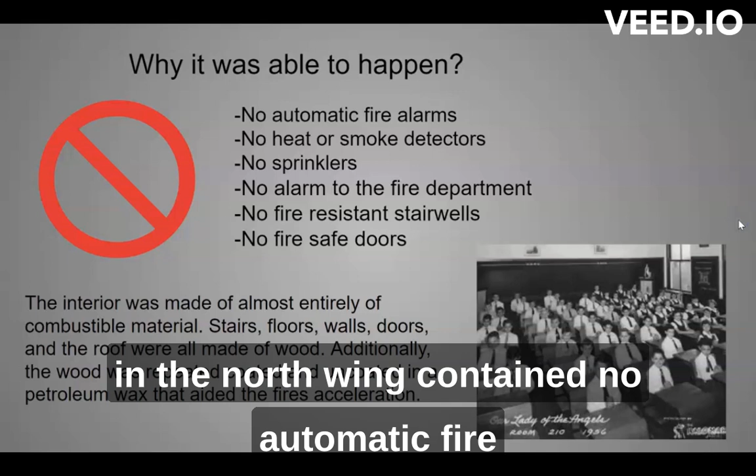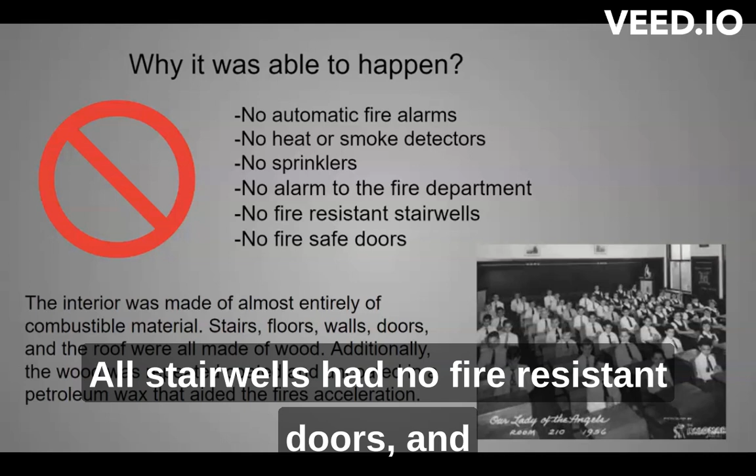Why it was able to happen. The building in the north wing contained no automatic fire alarms, no heat or smoke detectors, no fire sprinklers, no direct connection to the fire department. All stairwells had no fire-resistant doors, and the entire building was made of combustible material. Stairs, floors, walls, doors, and roof were all made of wood.

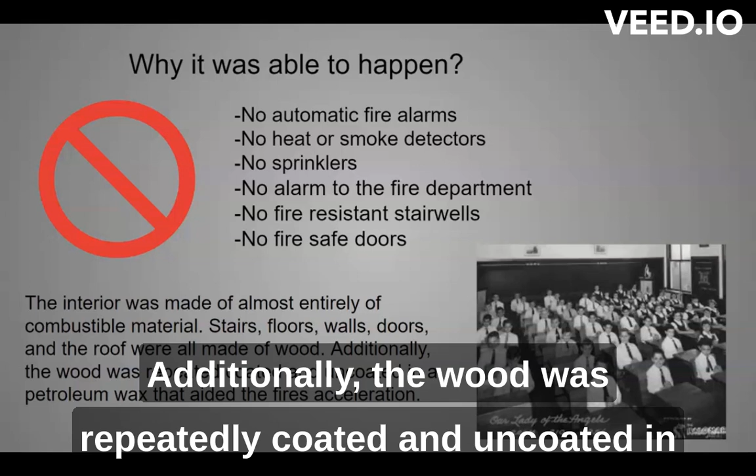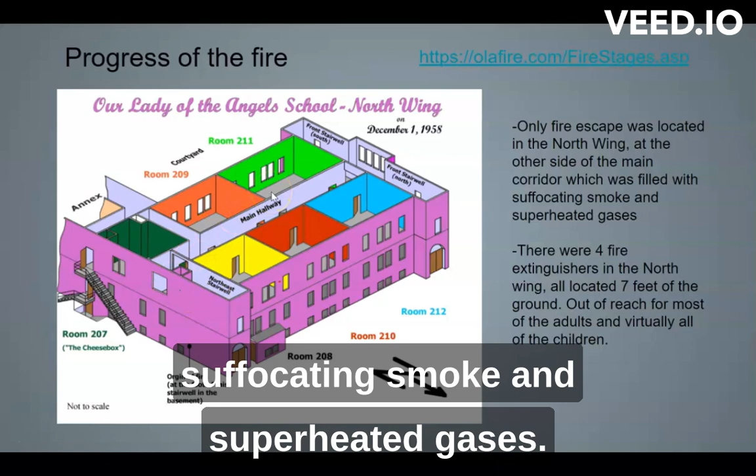Additionally, the wood was repeatedly coated and uncoated in a petroleum wax that aided the fire's acceleration. Only the fire escape located in the north wing was on the other side of a hallway filled with suffocating smoke and superheated gases. All 4 fire extinguishers were located 7 feet above the ground, out of reach of most adults and virtually all of the children.

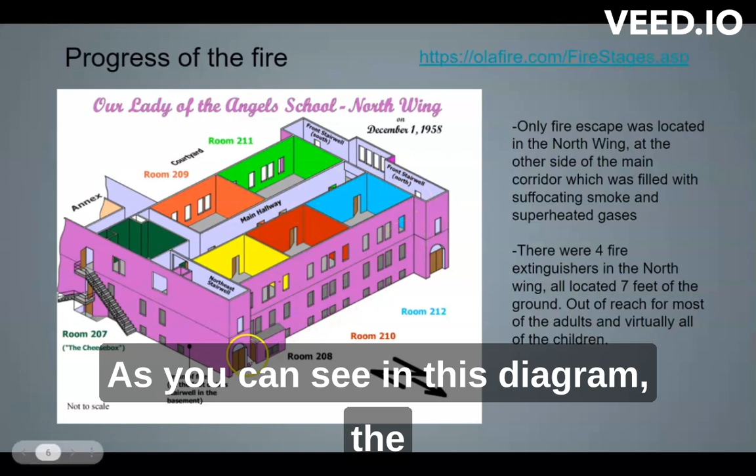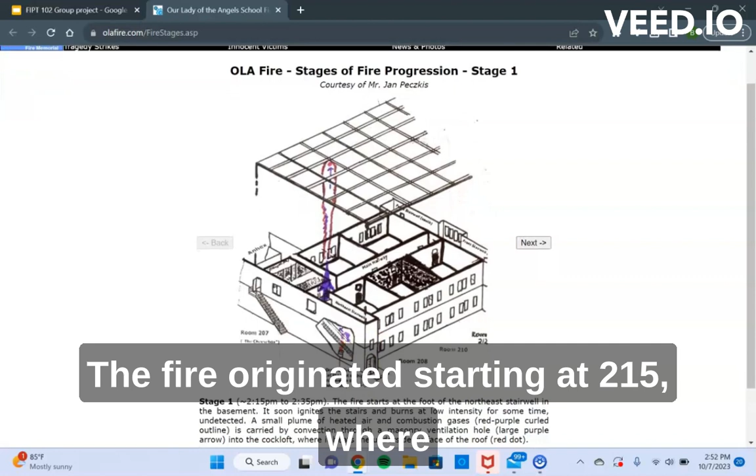As you can see in this diagram, the fire started here in the basement, where it quickly rose through the building. On olafire.com, we can see a good description of this. Right here, the fire originated starting at 2:15, where it would go unnoticed and burn the paper waste in the basement. As the heat accelerated, it cracked this window, adding oxygen to the fire, where it quickly grew.

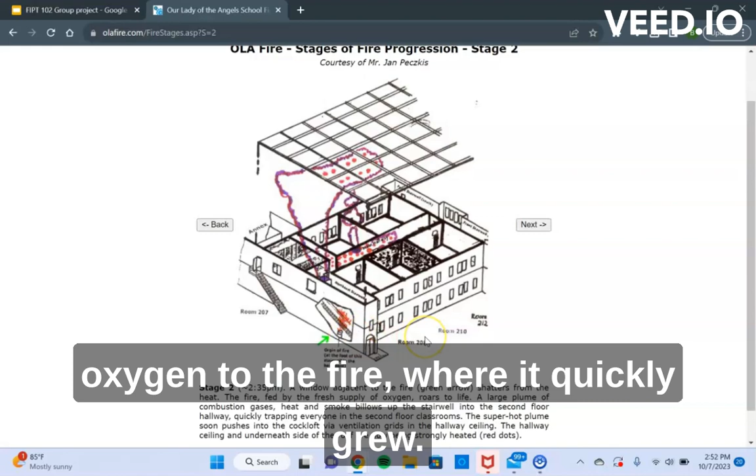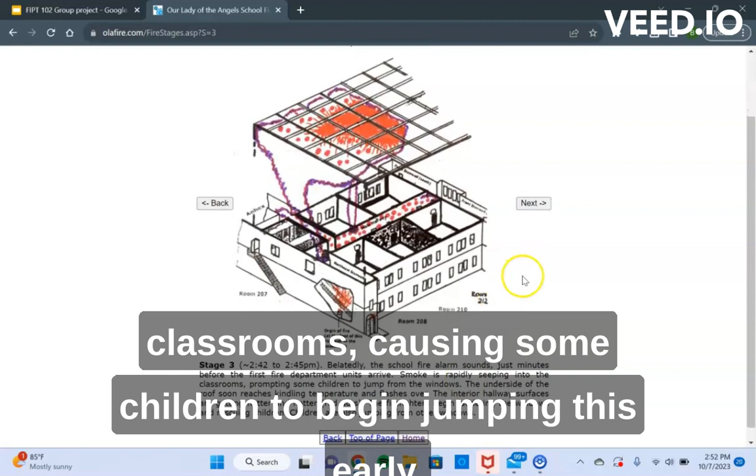Combustion gases, heat, and smoke all billowed up the staircases into the second floor hallway, quickly trapping everyone in the second floor classrooms. The superheated gases soon raised the alarms in the school, and smoke would rapidly be seeping into classrooms, causing some children to begin jumping this early. The basement was raised and each ceiling was 12 feet off the ground, making the windows a daunting 25 feet for these young elementary school kids to jump.

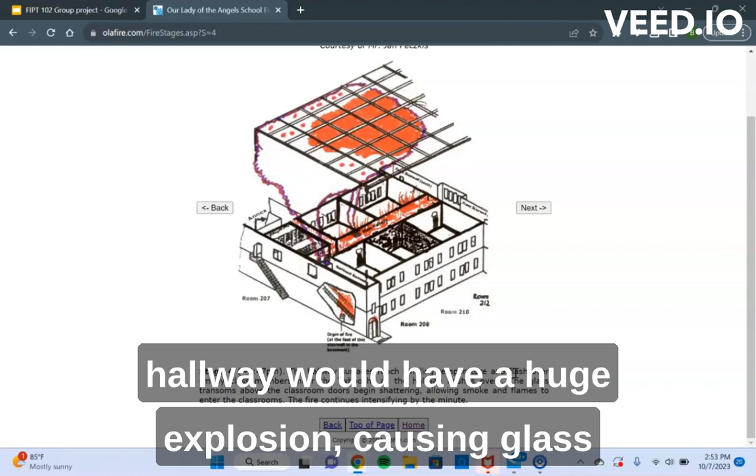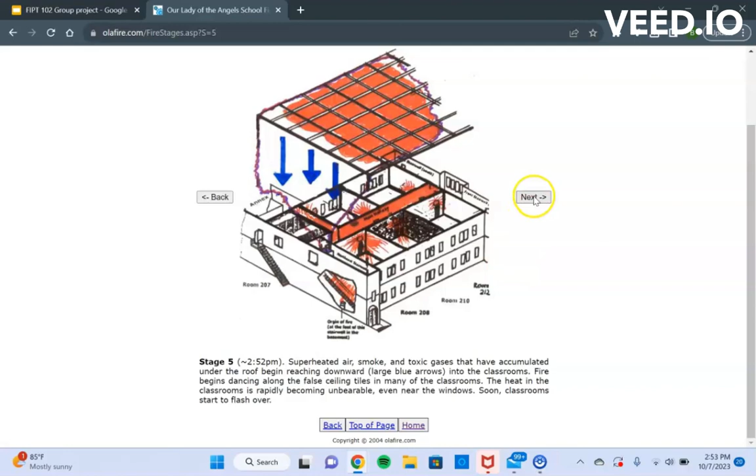As the fire grew, kindling temperatures would flash over on the roof, and the hallway would have a huge explosion, causing glass to break and doors to shatter. It would then cause the superheated gas and smoke to make the roof fall downwards, essentially killing everyone inside the building at the time. It would be a whole 45 minutes before firefighters would bring the fire under control and extinguish it around 4:30.

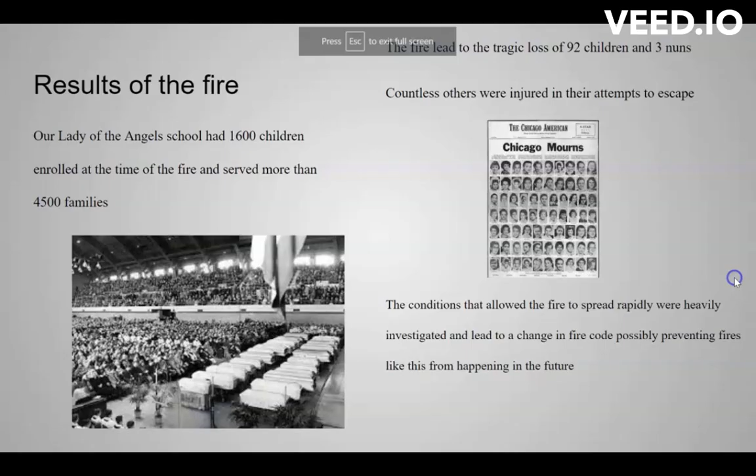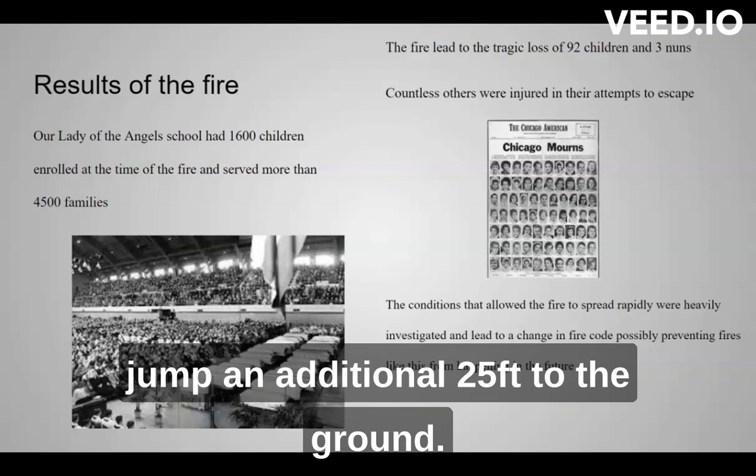The result of this fire led to the tragic loss of 92 children and 3 nuns. Countless others were injured in their attempts to escape, including hundreds that were trapped on the second floor that had to jump 25 feet to the ground. Our Lady of the Angels School had 1,600 kids enrolled at the time of the fire and served more than 4,500 families. The conditions that allowed the fire to spread rapidly were heavily investigated and led to change in fire code and possibly prevented fires like this from happening in the future.

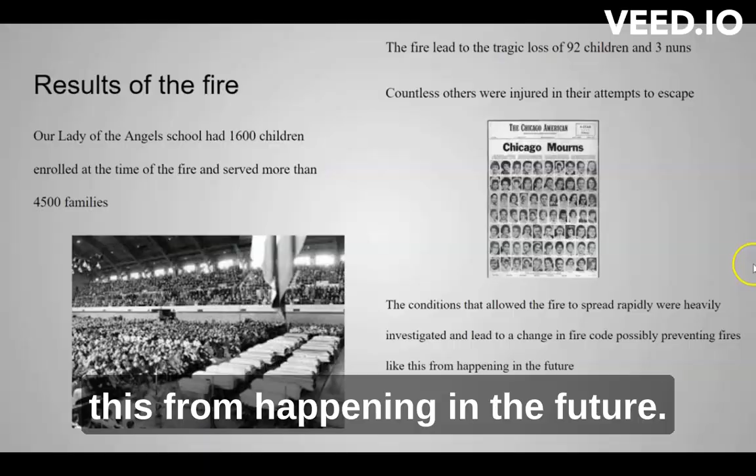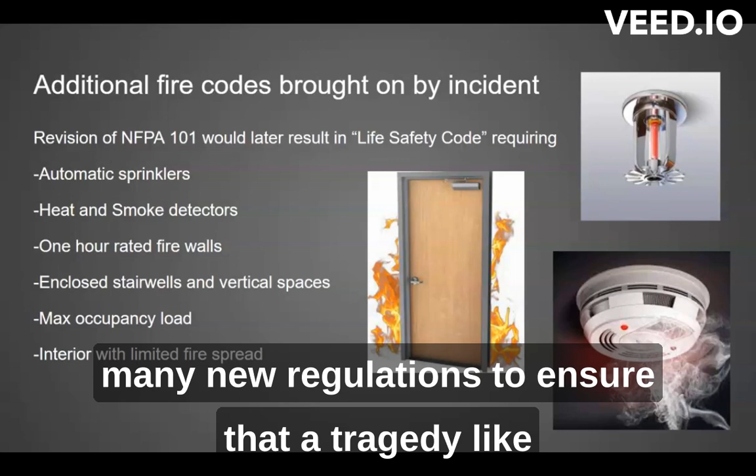Additional fire codes brought on by this incident would revise the NFPA 101 code to later name it the Life Safety Code. Our Lady of the Angels School Fire would then create many new regulations to ensure that a tragedy like this was less likely to happen in the future. Some of the new codes included automatic fire sprinklers in an area over 25,000 square feet, as well as any area lower than the exit level.

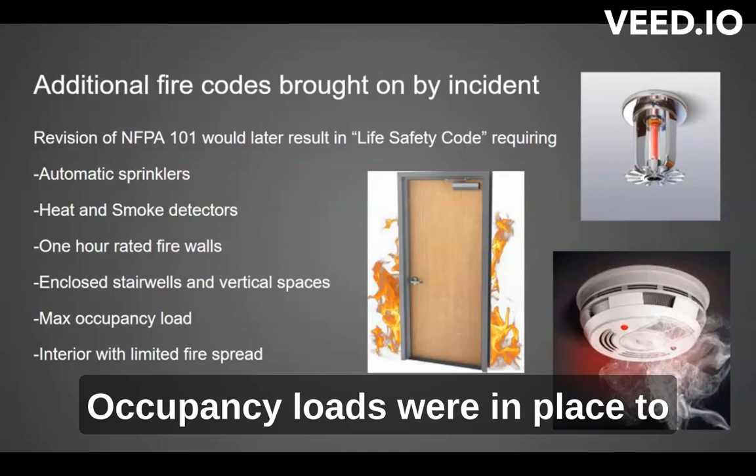1-hour fire-rated walls would be in place for any stairwell or classroom. Enclosed stairwells and vertical spaces would all have these fire-rated walls. Occupancy loads were in place to make sure that no mass casualty incidents happen from these contained fires. It was based on square footage and a max of 50 kids in a classroom that only had one exit.

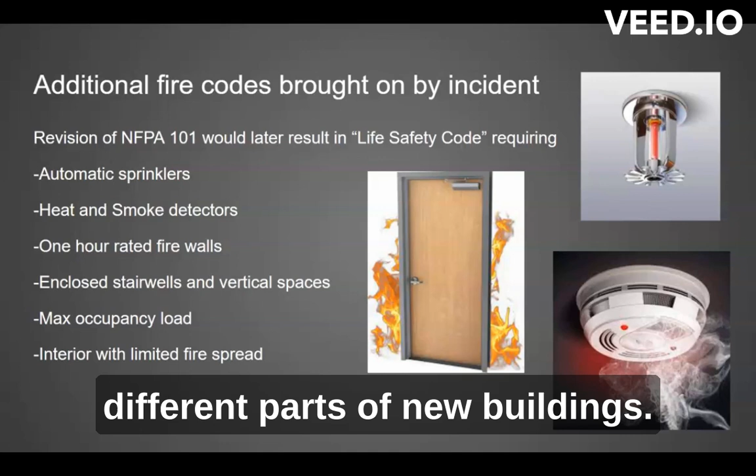Fire alarm systems, manual pull handles, and heat and smoke detectors would be required in different parts of new buildings. Interior walls and ceilings would have to be made of a limited fire spread material so that the fires would less rapidly accumulate. Waste containers would also have to have non-combustible materials and a lid to cover any paper waste.